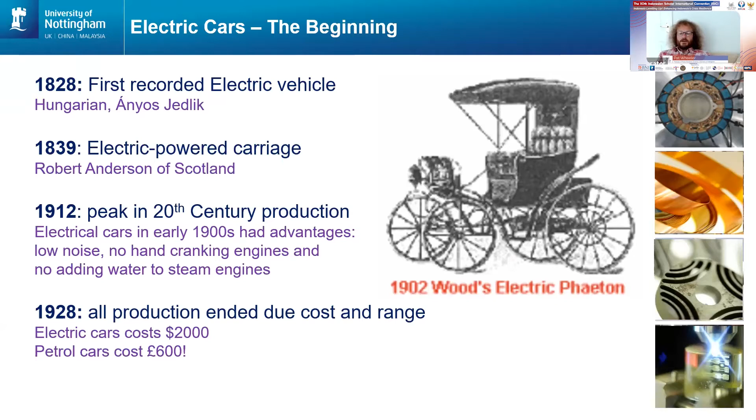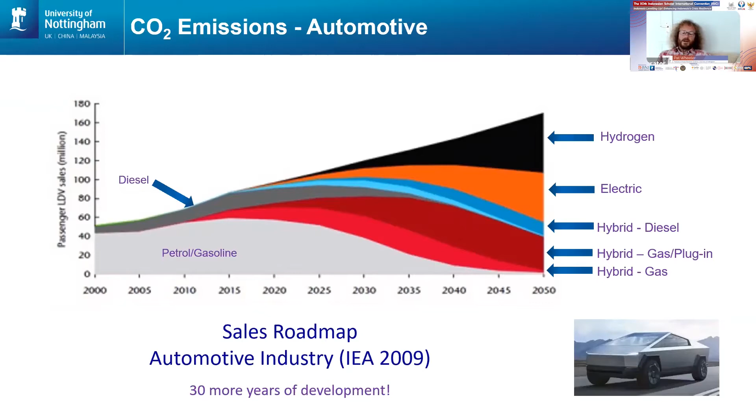Those of you who know the University of Nottingham know that we are heavily involved in electric vehicle technology and demonstrating it. One of the things I've been doing over the last 5 or 6 years is running a superbike race team. We built a number of electric motorbikes capable of speeds of over 300 kilometers an hour, and we went racing on those bikes.

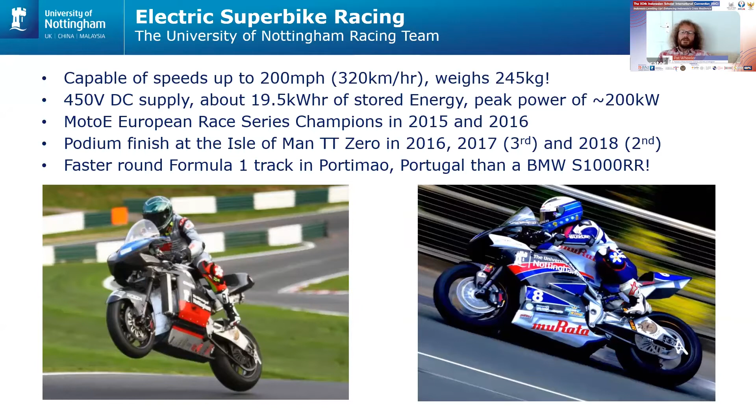This is not a slow motorbike. This is a bike that can go around a racetrack faster than a BMW superbike. There's a number of reasons why we did this. One reason was to promote electric vehicle technology. As a university, we felt we had a responsibility to demonstrate that the technology was good and exciting. There's nothing like a race bike to show that it's exciting technology.

We could have put that same technology into a truck and driven it around campus, but it doesn't generate the same excitement. We also wanted to push the boundaries of the technology. The great thing about going racing rather than producing a production vehicle is that we were able to try out and test new technology. Various PhD students' designs for electric motors, power electronic converters, and so on have been put on that bike and taken out on the racetrack.

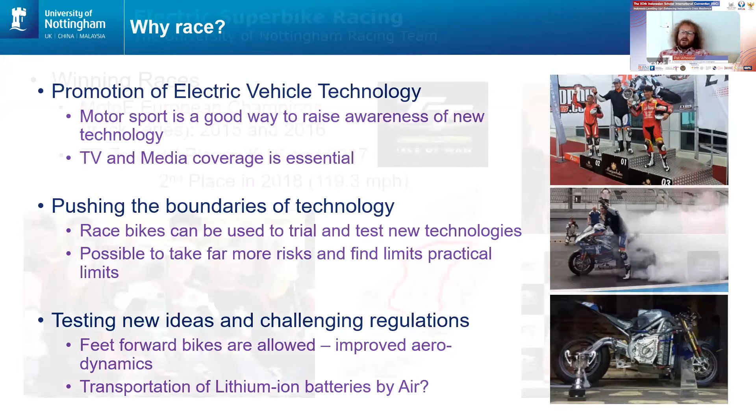It's been great fun for us because we've won a few things over the years. In 2015 and 16, we were the European Race Series champions. In fact, in 2016, we were running 2 bikes and had great fun doing that.

But the bikes themselves are actually designed around the Isle of Man TT. Those of you who don't know where the Isle of Man is, it's a small island in the Irish Sea between the island of Ireland and England. And every year they close some of the roads on the island for 2 weeks and race motorbikes around that track. Now that track is small local roads, and it takes about 20 minutes to drive around there at speeds of about 120 miles an hour average.

So we built a bike and we've gone and tested it by racing it against companies like Honda on the Isle of Man. And when you look at the drivetrain, the electrical part of that system, you find it's very simple. We have a battery, which is a large battery, weighs about 100 kilograms. That energy goes into a motor drive that controls the motor, and that motor drives a chain which drives the rear wheel of the bike.

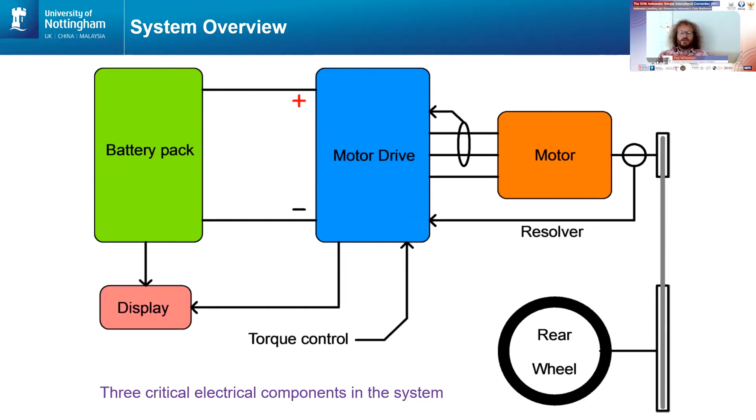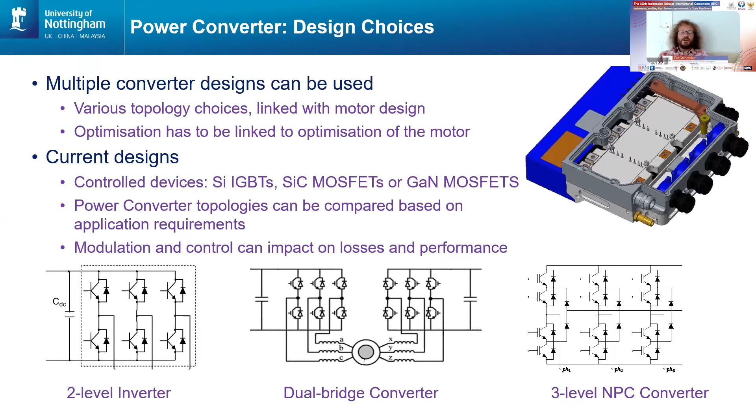There's a lot of technology recently changing in the world of power electronics, so the controller to control the motor. And any of you who are electrical or electronic engineers will recognize some of those circuit diagrams there, showing the type of power electronic converters that we're using in those applications. And the new materials that we're using there have an important impact. What we're seeing is that the efficiency of the systems is increasing.

Now that's important. So we've got the new materials in power electronics allowing us to increase the efficiency of the controllers in these electric vehicle applications. That's important because the weight of the battery depends on the amount of energy you need to store, and you would like that energy that you store in that battery to go into the wheels of the vehicle and not be lost as heat. So improving the efficiency of the system, we're also doing the same with the electric motors, is a great way to improve the overall efficiency and energy use of the vehicle.

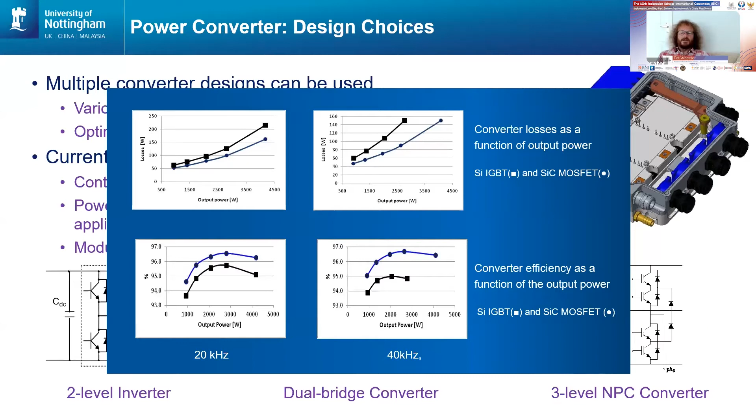So the electric motorbike is just one example of the types of systems we can design, build and test. And we've used that as an example of a road vehicle. We've also been on a journey with electric aircraft, looking at, is it possible to get rid of jet fuel, something that's burnt relatively high up in the atmosphere, and something that is a significant contributor to the CO2 emissions and so on. So can we reduce or even eliminate what comes from the aviation industry, and can we do that again using electric energy?

Well, we've been on a long journey with this one. So we didn't start with making the propulsion system of an aircraft electric. Where we started was making the aeroplane itself as a big system more electric. And when we looked at a typical aircraft 25 or 30 years ago, we found they had 4 power systems on that aircraft. One was electrical, which was doing important things like the in-flight entertainment, the lighting and the avionics.

There's also a pneumatic system, which is a high pressure air system, which was used for the air conditioning, cabin pressurization, and ice protection. There's a hydraulic system used for the flight controls, and a bit of fuel pumping and oil pumping on the engine to get the jet engine to work. And the idea of the more electric aircraft was to go from 4 power systems to 1 power system to make the aircraft a little bit lighter and a little bit more efficient.

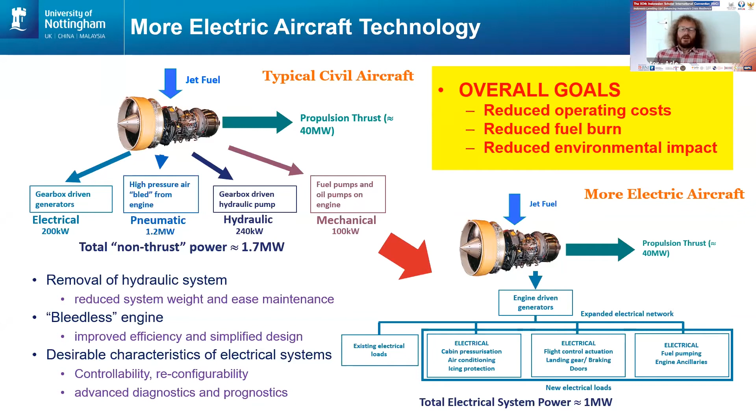And if you fly on modern aircraft today, such as the Boeing 787, you'll find that you won't notice it necessarily, but those aircraft have these more electrical systems and are therefore more fuel efficient. So we've been taking some steps in that direction for a long time. The next thing we want to do is to look at that 2050 goal, so 30 years time.

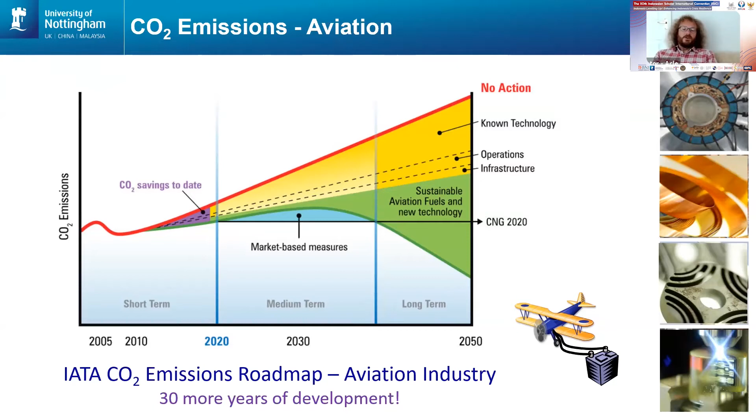So a lot of work to be done and a lot of things we can do in universities to help develop this technology. And one of the things they're wanting to do, this is the roadmap from NASA, but there's plenty of others around, is to make the propulsion of aircraft electric rather than using gas turbines to provide the propulsion itself.

And you can see that over the next 30 or 40 years, the idea of slowly larger and larger aircraft having propulsion systems, I'll say what I mean by a propulsion system in a moment, that are run electrically. It will then be another 20 years before those aircraft all get into service and displace the existing aircraft. So this is not a quick thing to do. This is something that's going to take many decades of work.

But when we do this, we'll find that that will be something that will really help us to meet those emission targets for the aviation industry. And one of the things we find with this is that when we go into this electrification, we need some big electric motors that are high power but very small.

And one of the things we're finding at the university at the moment, if you look at the chart in the top left there, is that the aircraft requirements for larger and larger electric drive systems has a particular trajectory, but the drives that we're able to produce at the university are well ahead of that curve. So that's the series of motors you can see built up on the left-hand side there. And those are just examples from Nottingham. Plenty of other universities are working in the area.

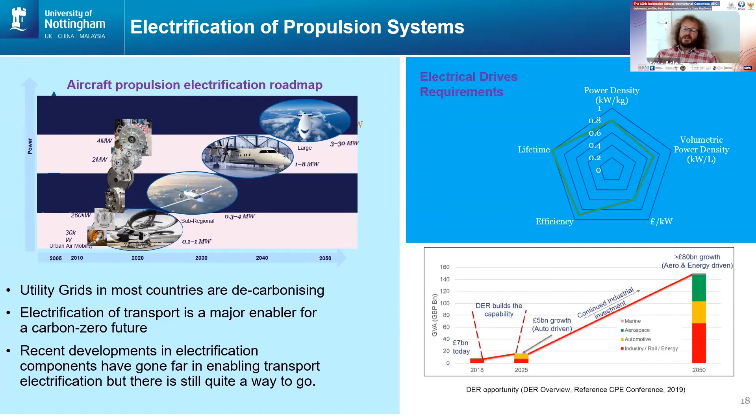So the advantage of that is that the generator will sit in line with the passengers, generating electricity, and then we'll be using electric motors on the wing as the propulsion system. The reason we want to do that is because you can run the generator at its optimum point in terms of efficiency all the time, and because the motors are smaller and generally lighter than the generators, so present less wind resistance to the aircraft.

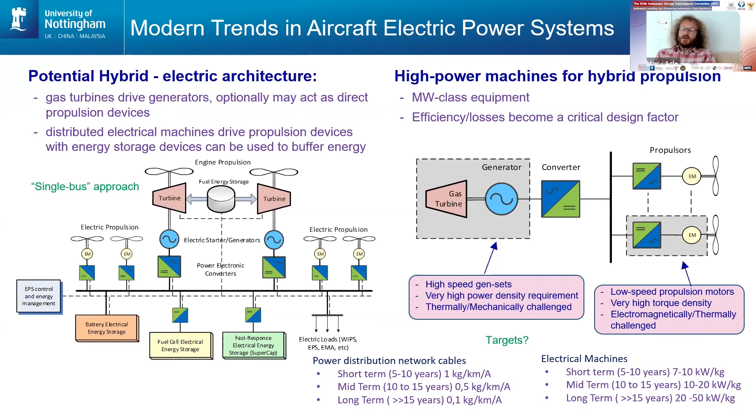So that's the sort of direction that we're going in with the aviation industry, and there's lots of technology going into that, lots of university research in various areas, materials, electrical, mechanical engineering, and lots of demonstrators. This particular demonstrator is a 4 megawatt demonstrator for a regional aircraft.

And as a university, we've also got involved in some projects where we're actually looking at the integration of this technology onto aircraft engines. So this is one we've done with Safran Power in France, where we've put a motor and some power electronics around a traditional turboprop engine in this case, to provide a boost to that engine. Again, it's all about saving energy. It's all about the flight being more efficient and using less fuel.

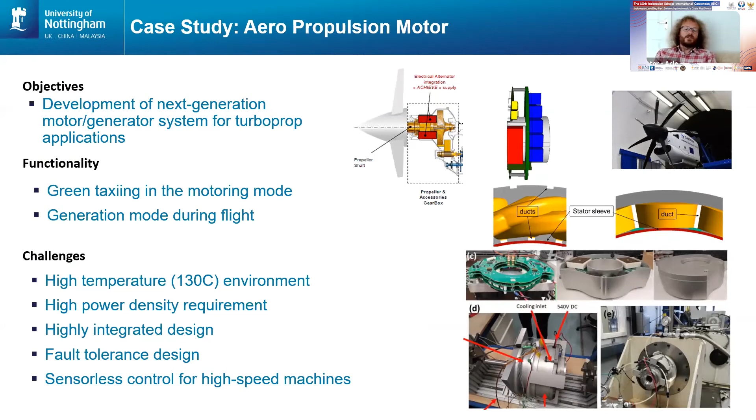So hopefully just about on time.

COVID-19 is going to cause a blip in demand, particularly in the aviation industry. We're seeing that. But a 2-year blip in demand is not significant in terms of the 30 to 40 year roadmaps we're seeing, particularly for aviation. And it has given an appetite for change. So that's something we'll see in the automotive industry.

So the electrification of transportation is happening. Technology development is essential to that. And so therefore, any of you who are going into any relevant technologies as research in universities, you find that that's a great area to be in. Power electronics and electrical machines are key technologies that need to be understood as this industry changes. And energy storage systems really must improve if we're going to have the uptake of transportation electrification that we would all like to see for the good of the environment.

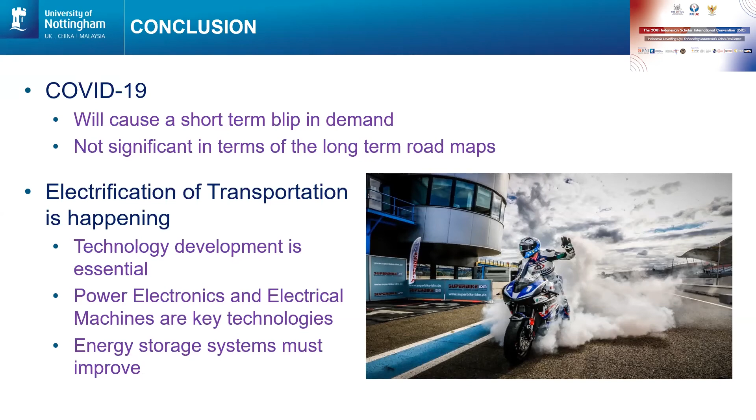Due to time limit, we have summarized all questions from the audience into one big question here. So as we know, the transition from fossil fuel vehicles to electric vehicles will take time in some geographic regions, especially in Indonesia. So what do you think is the key success of this transition, and how soon could electric vehicles be massively implemented in Indonesia?

Well, that's an interesting question. You can start implementing electric vehicles. Well, I suspect there's some already being sold. There's two things you need to do. One is to make sure that you have the vehicles on sale in the country. And certainly in the UK now, I can go into most car garages and buy an electric vehicle. And I can walk down the road from where I live near Nottingham and buy an electric motorbike. So you need to be able to purchase them.

But the other thing you really do need is the infrastructure to support them. If I buy an electric vehicle and I drive to the University of Nottingham, I can plug it in every day and charge it up. We have charging stations on campus. But when I drive a long distance, I also need to be able to charge up my car at service stations on the motorway networks. And there's constant complaints in the UK that there aren't enough charging points, that there's too many electric cars already on our roads for the number of charging points. So there's a need for that customer-facing interface to charge the vehicles.